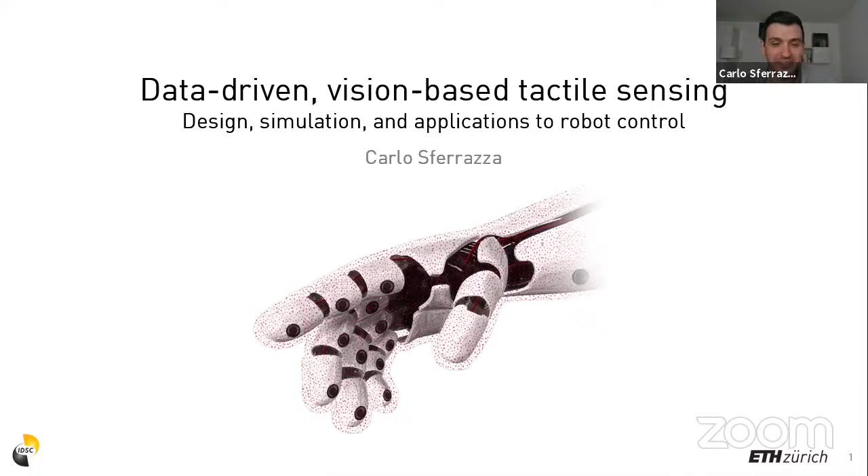So I believe that robots need a dexterous sense of touch to address most of the interaction tasks that they're going to face and that involve physical contact. And this would enable a number of applications, so from warehousing to entertainment, from human-robot interaction to medical devices. And in this context, in the last 5 to 10 years, we have seen an incredible growth in the development of high-resolution tactile sensors for robotics applications.

And these tactile sensors can be based on a variety of different principles. For this reason, I believe that now more than ever, we need to extract intermediate representations from the raw tactile data, such that the techniques and the results could be reused and reproduced even when not the same tactile sensors are being employed. And this will be one of the main messages of my presentation, as I will detail later in the talk.

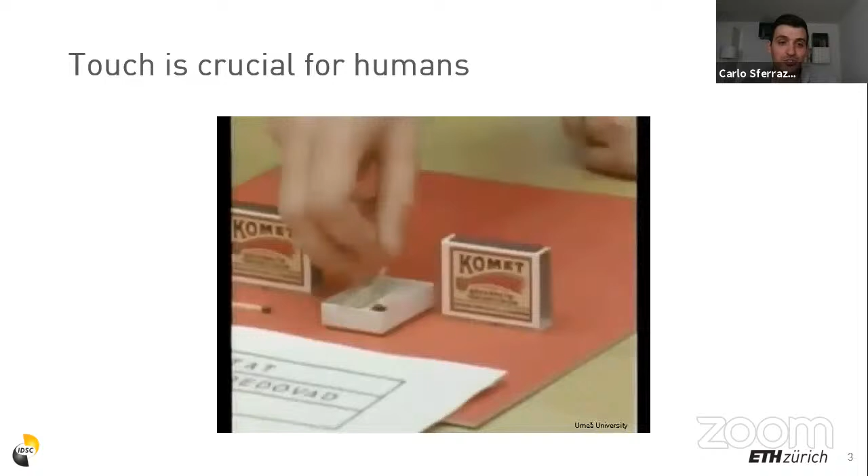But let's take a step back and with a short introduction, see what we generally mean with sense of touch and try to understand the importance of the sensory feedback in humans to possibly extract some requirements for robots. You may have already seen this video where a woman has had her fingers anesthetized, and therefore she can only use her sense of vision, her sight, to perform a very simple task as striking a match. And she's having a very hard time just because she misses the dexterous information usually provided by the sense of touch.

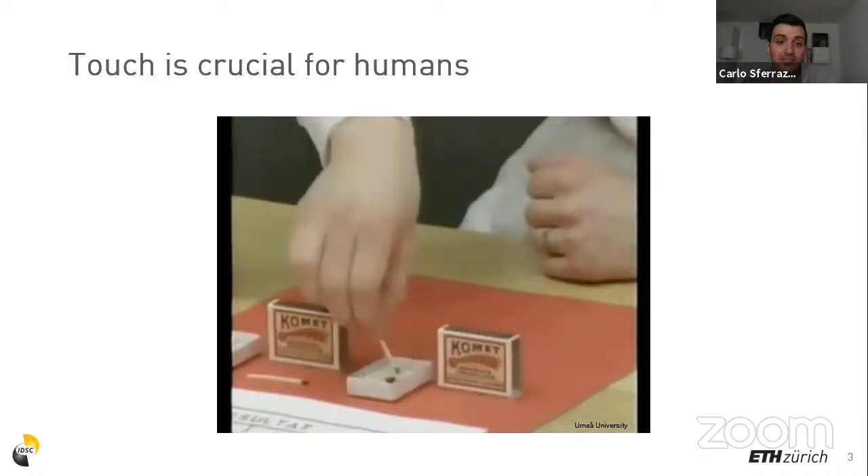If we instead look at robots, the very traditional way of getting touch or contact feedback were force torque sensors. However, these sensors are pretty bulky and they are stiff, so generally they are only used in the robot wrist. Therefore, when interacting with the environment, they only provide information about the forces acting at a single point, usually at the center of the sensor. In contrast, I'm going to show you 3 examples of how the human sense of touch is much more capable than this, which has motivated the increasing development of modern tactile sensors.

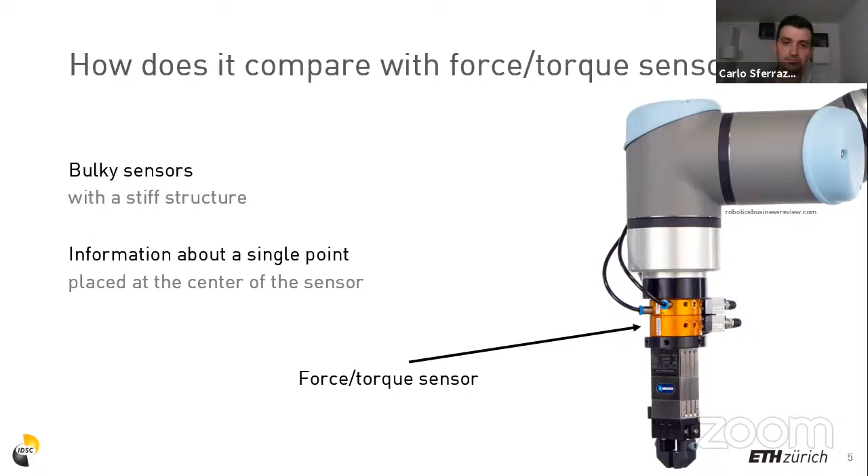First, we have soft and dexterous hands, which provide us with stable gripping when we handle an object, exploiting, for example, the high compliance and the friction of our skin. Additionally, our receptors can very well detect and distinguish between shear and pressure forces, even when they are simultaneously applied over the skin. Finally, our receptors are not limited to specific regions, but distributed all over our body.

And this in particular allows us to perform difficult tasks, as when we do not only use the hands, but also the legs and our chest to lift a heavy box. So we have these sensors, our receptors, that are placed all over the skin, which means over different types of surfaces, which can be either curved or flat. So using these capabilities as an inspiration, I'm going to describe a vision-based tactile sensing principle, which especially tackles the requirements of high resolution and scalability.

The sensing principle is based on the tracking of particles within a deformable surface. So for this, we use a camera, which we place inside this aluminum part, and we surround it with LEDs for constant illumination. On top of the camera, we place 3 layers of silicone. A soft and stiff layer that is transparent and serves as a base for the other 2 layers.

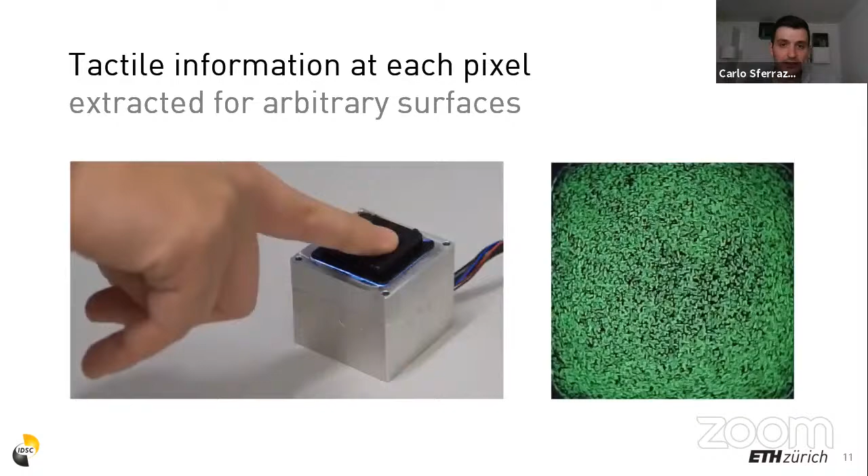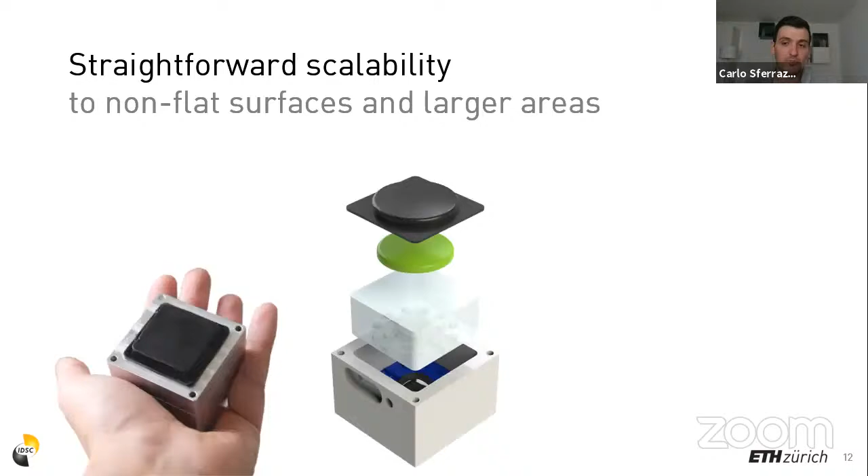The technique I described does not assume the surface to be necessarily flat, as in the case of the sensor that I just showed. In fact, we've also built sensors with slightly curved surfaces, for example, to resemble fingertips, or sensors using multiple embedded cameras, as in the one on the right, where we used 4 Raspberry Pi cameras to achieve at the same time a reduced thickness and a larger surface.

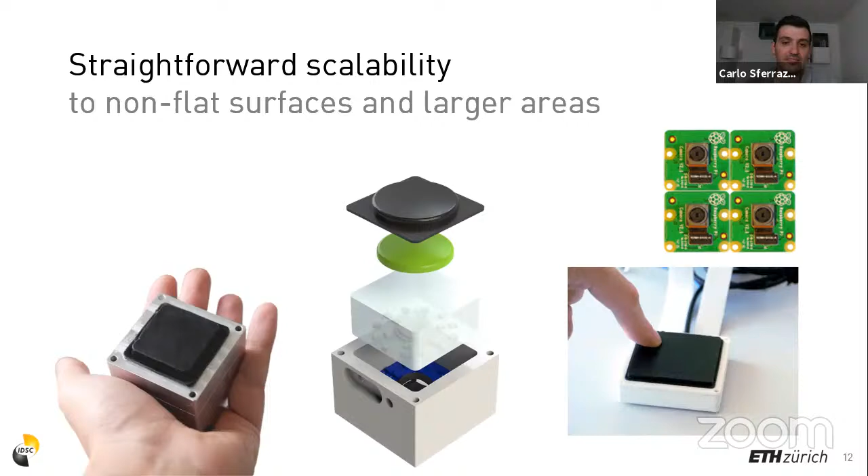All these sensors were fabricated in the same way without any special adaptation and rely on the exact sensing principle, proving the easiness and the scalability of the approach we proposed. So the sensing principle provides raw tactile data in the form of pixel intensities. But how can we further process the pixel information to extract an intermediate representation that can act as a powerful abstraction to plan generic robotic tasks?

So looking at most of the tasks, we are generally interested in total forces, both shear and pressure forces, and contact patches, which are the surface regions in contact with an object that provide, for example, information about the shape of the contact object. And we want to estimate these quantities for arbitrary contact conditions, so possibly for multiple points of contact and for interactions with objects of different shape.

And if we manage to do all of this in real time, we would then have a very powerful sensor which will truly provide the rich information ready to use for generic tasks. With this requirement in mind, we decided to move towards the estimation of a very comprehensive quantity, which is the 3D contact force distribution. And in fact, from the force distribution, one could compute the total contact forces by simply integrating the distribution over the sensing surface.

And one could retrieve the contact patches by detecting the regions where the distribution is greater than 0. And this representation remains valid for the different possible contact conditions, therefore multi-contact, arbitrary shapes, and so on. However, since we want to estimate a finite dimensional quantity, we need an additional step. For this reason, we discretize the sensing surface over a finite number of bins and compute the force distribution as a set of 3-dimensional vectors indicating the force acting at each of these bins.

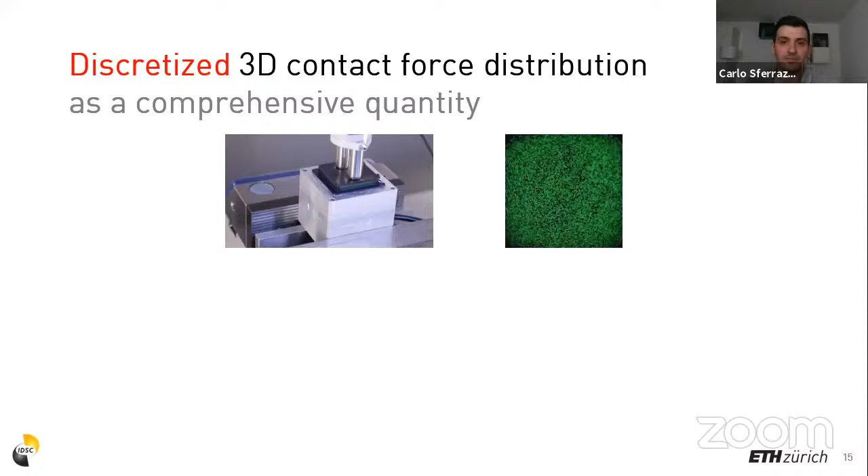So it means that if we make contact with a test object that has multiple points of contact, for example, 2 in this case, we get this image that is to some extent interpretable to a human observer if you can spot sparser regions in the marker distribution here. But we want to further process it and extract a 3-dimensional force field out of it, as you can see here at the bottom. So here we used 400 bins, where the side of each bin was about 1.6 millimeters.

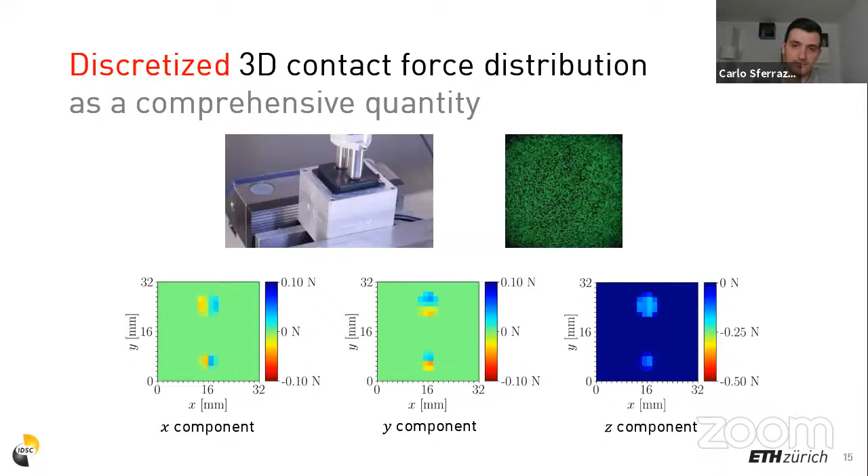And we want to be able to sense contact locations, but also the force profile. Here you can see a higher force in this point, for example, since this finger-shaped body at the top was going deeper into the material than this other one. Therefore, summarizing our task, we have tactile images as inputs and discretized force distributions as outputs. We try to reconstruct these outputs, the force distribution, from the images observed at each time step.

And we do this in a data-driven fashion, since such an approach can theoretically exhibit arbitrary accuracy, depending on the data provided. Essentially, compared to model-based methods, we don't have to compromise accuracy by making model simplifications to retain real-time tractability. We just need to provide very accurate data. And additionally, data-driven approaches generally show very fast inference times, especially if we make use of tailored learning architectures.

Of course, we need to collect training data, and I'm going to show you how we can do this in the next slides. Okay, consider a very simple case where we have a point indentation. So an indentation with a very sharp contact object like a needle. And assume that we do vertical indentations and we only have vertical force, so we can neglect horizontal forces.

Now, if we can measure such vertical force, for example, with a ground truth force torque sensor as the one I showed you before, then we can actually measure the contact force F. And by discretizing our surface into bins, we can assign the force F that we read to this bin here in the center and 0 to all the other bins where there was no contact.

In this scenario, we can even automate the data collection. For example, if we attach such a needle indenter to the spindle of an automatic milling machine, we can then also attach a force torque sensor here at the top, and we can perform thousands of indentations with such a needle-shaped indenter by moving the spindle all over the sensing surface.

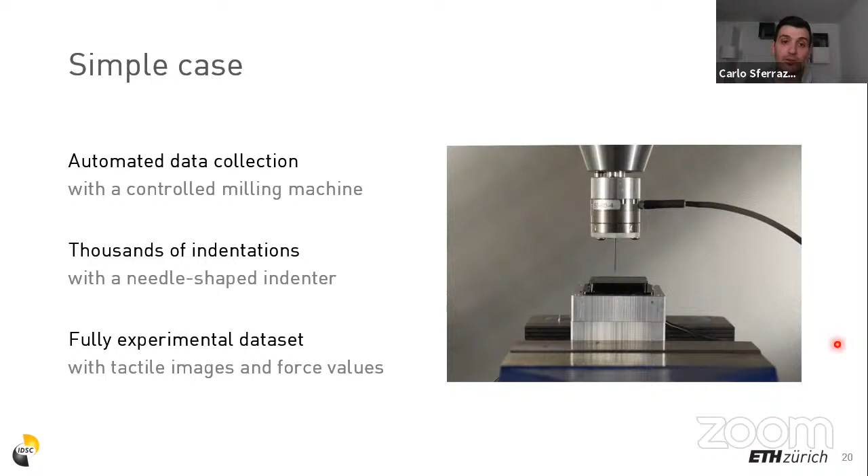In this way, we can collect a fully experimental dataset where we have tactile images captured during the data collection from the internal camera and force values that are recorded by the ground truth sensor.

However, in a general case, we have multi-bin indentations. So we have indenters of arbitrary shapes that do not cover only a single bin, but they cover an arbitrary number of bins. And we want to estimate a 3D force distribution, so comprising both pressure and shear forces. The issue is that we do not have commodity sensors that can accurately measure the force distribution in the real world.

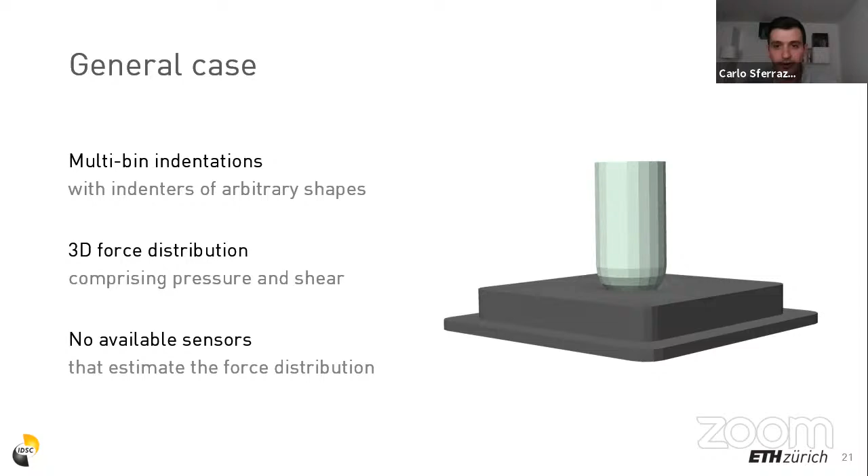So to overcome this issue, we perform in simulation the same indentations that I showed before with the automatic milling machine, but this time we do it in a finite element environment. And for this, we represent our sensor with very accurate hyperelastic models, which we obtain by a state-of-the-art material characterization experiment, of which you can see an example in this video.

And since this is actually the best we can get, we can assign such a ground truth label to the corresponding images that we can capture in real-world experiments, for example, with an automatic machine. Of course, we anyway verify the accuracy of the labels on what we can actually measure in the real world with commodity sensors, the total force.

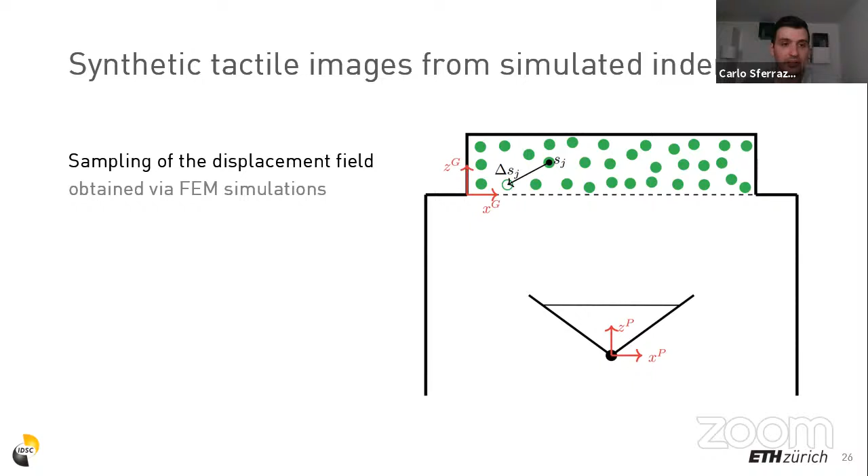So we asked ourselves, is there a way to get rid of this time-consuming data collection and do everything in simulation? Well, we can do this, and for that, we need to simulate the tactile images as well. And we can do this by first sampling the displacement field obtained as well in the FEM simulations.

So what we have to do is to account for the fact that the displacement field we obtain from the FEM is given in a frame which can be not centered with the camera. Therefore, we need a usual transformation described by a rotational matrix and the translational vector from the frame of the FEM to the reference frame of the camera here.

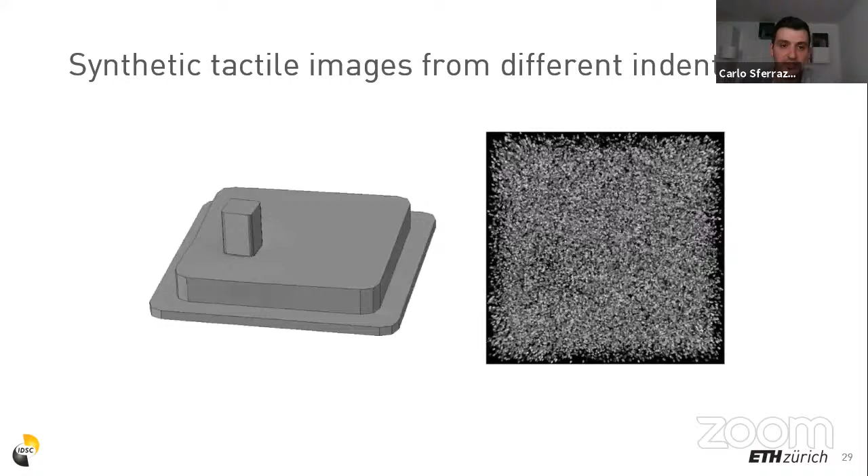And so in the end, we can collect a data set, which is made entirely of synthetic tactile images that we can express as a two-channel tensor. Two channels because the first channel contains an image which is taken before deformation, and the second channel contains the image after deformation. You can see here the sparser regions that arise after deformation.

And at each of the samples in the data set, we randomize the distribution of the markers, and in some cases also the density of the markers, as you can see in here, it's a bit of a sparser distribution. So summarizing, we finally have both features and labels from simulation, where features are raw tactile images with a randomized distribution of the markers, and all these images are obtained from finite element simulations. The same finite element simulations provide us the labels, our ground truth force distributions.

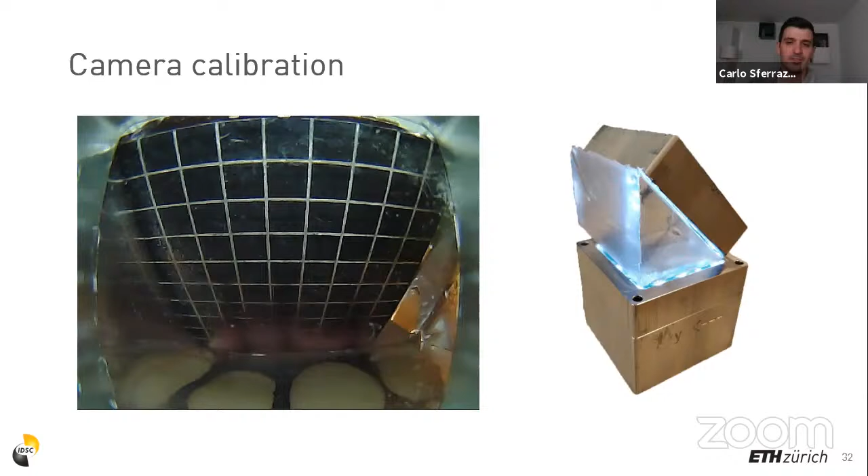But since these data are valid in the simulation domain, how can we make sure that whatever mapping we learn from this data also works in reality? For this, we need an additional step, which is camera calibration. Essentially, we need to take some pictures of a predefined pattern to extract the camera model. And since we use our camera through a silicone medium, we need to do the calibration also through silicone.

So essentially, what we do is to collect 6 images of this predefined grid pattern through some silicone shapes. And by using a state-of-the-art calibration technique, we can obtain both the intrinsic and extrinsic parameters of the camera with a sub-pixel accuracy. Finally, we use the model we obtained from calibration to remap the images taken in the real world as if they were shot from the ideal camera that we used in simulation.

And this is a crucial part because we can redirect any instance of sensors that we fabricate to the same pinhole camera model. And this adds a lot of benefits to collecting data in the pinhole camera frame. So this is how remapping works. For each pixel in the ideal pinhole camera, we can project it through the 3D world by making the assumption that the particles have a fixed vertical coordinate. And then we can project back through the calibration parameters to the real world image to find the corresponding pixel.

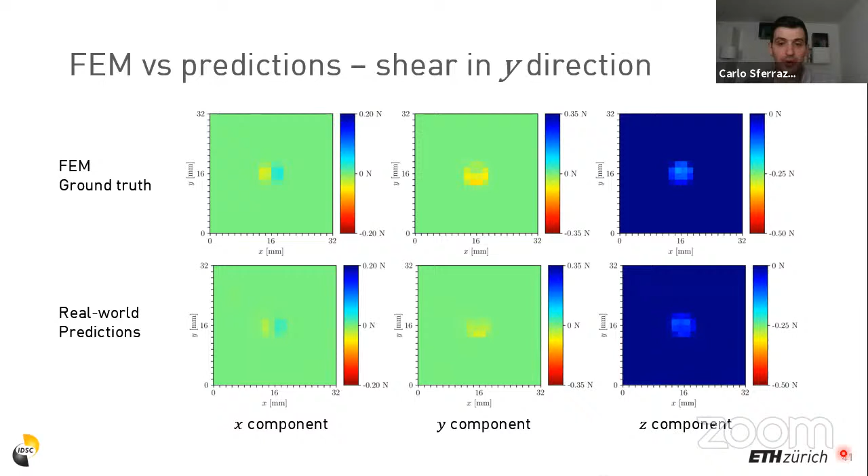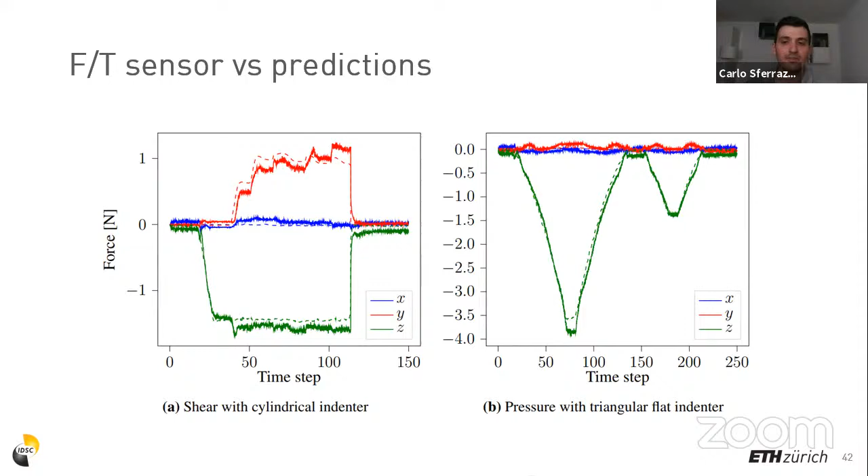Finally, even if we only train the neural network on data consisting of a set of specific contacts, the convolutional structure of the network shows generalization capabilities when applied also to generic objects, as well as in the contact with multiple bodies, a case which was not present at training time.

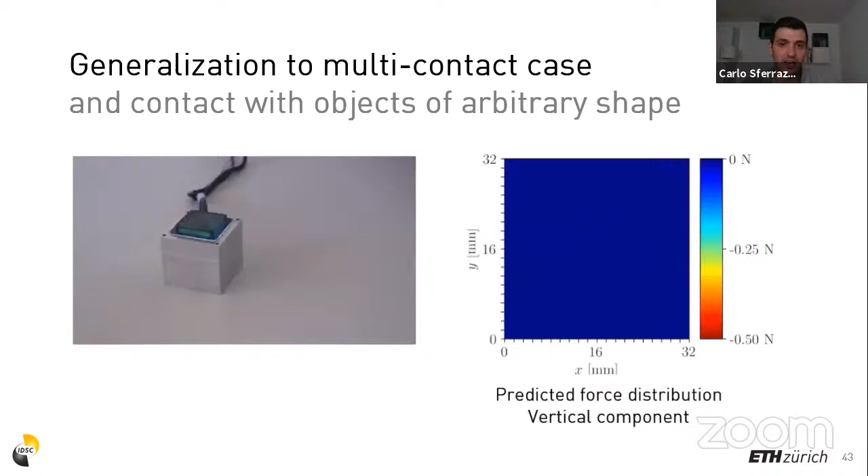So drawing an outlook on this work, let me point out that the current simulator is static, so it neglects all the dynamic effects that can be of interest for certain applications. And in addition, we only consider a fixed friction coefficient, as I showed you earlier, tuned with one indentation. It worked well across several materials that we tested, but if a more accurate estimation of the friction coefficient would be necessary, then you would need to identify this coefficient, for example, over time from different frames of the tactile images.

Finally, here we focused on building a very accurate simulator such that we could achieve a seamless transfer from simulation to reality. However, one could think, for example, of using domain adaptation techniques that explicitly aim to reduce the gap between simulation and reality.

So the next thing we asked ourselves is, how can we use this powerful physical representation as the force distribution that we can now estimate with our sensor to achieve dynamic tactile control tasks? So we wanted to design a testbed that was at the same time low-dimensional, but representative of the problems encountered when dealing with contact in a generic manipulation scenario.

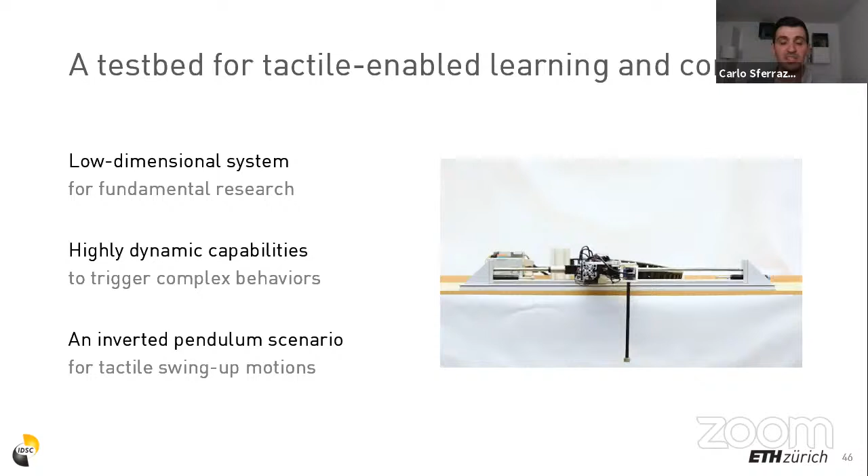We also wanted our system to be capable of highly dynamic motions, for example, to trigger complex behaviors that are often neglected when one performs slower manipulation tasks. Therefore, we built a system that resembles a classical inverted pendulum, but without a mechanically fixed pivot point. This means that we want to grab a pole and swing it up to a vertical position without having the pole physically attached to the gripper.

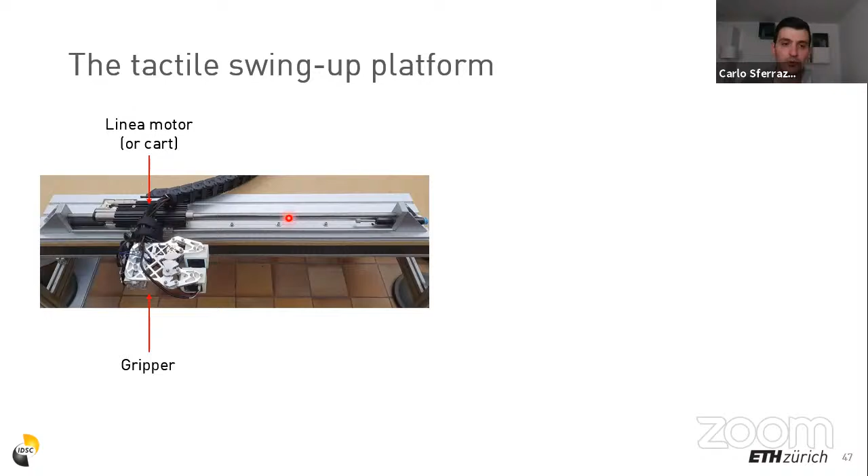More in detail, the system is based on a linear motor that we call a cart that displaces the gripper over a stator. And if we look at an exploded view of the gripper, this is actuated by a servo motor, a Dynamixel, and mounts two fingers equipped with two of our tactile sensors. And the sensor used here is the one I showed you earlier in the talk, with a slightly curved surface to recall a fingertip.

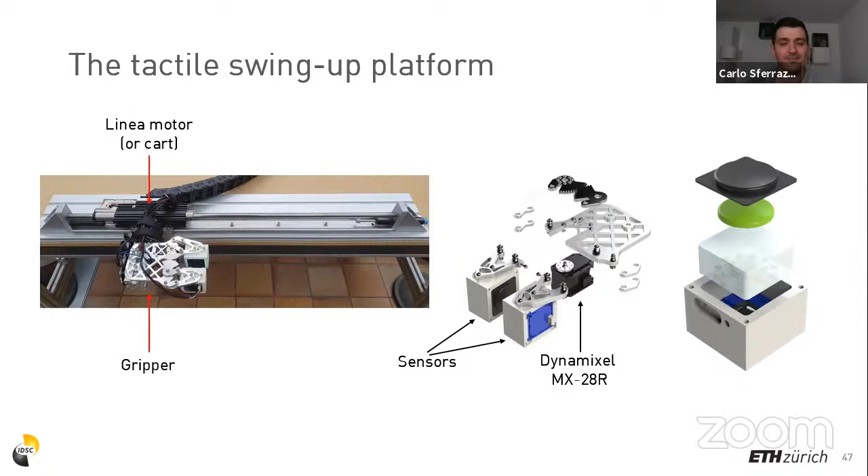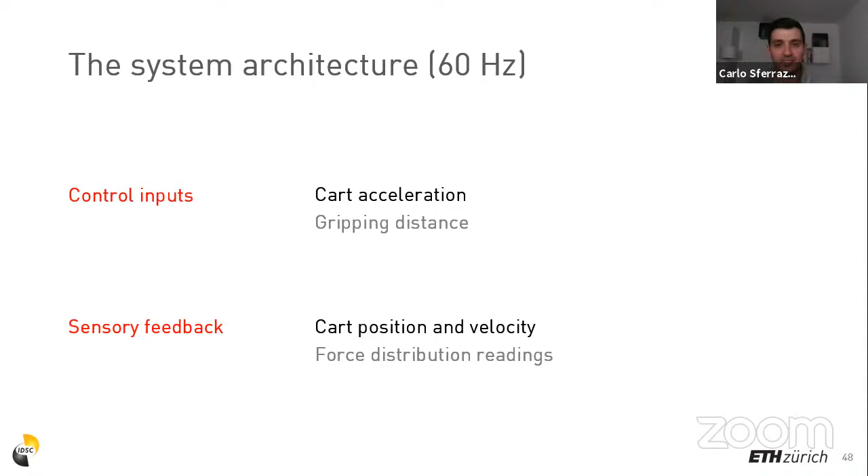Therefore, summarizing the system architecture, we have two control inputs, which are the cart acceleration and the gripping distance. And we have sensory feedback about the system, namely the cart position and velocity, and the force distribution that we measure with our tactile sensors. Everything runs on embedded platforms.

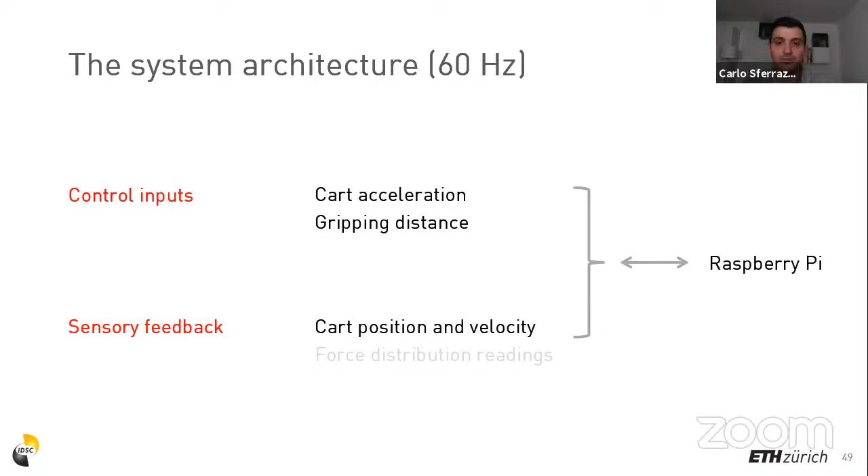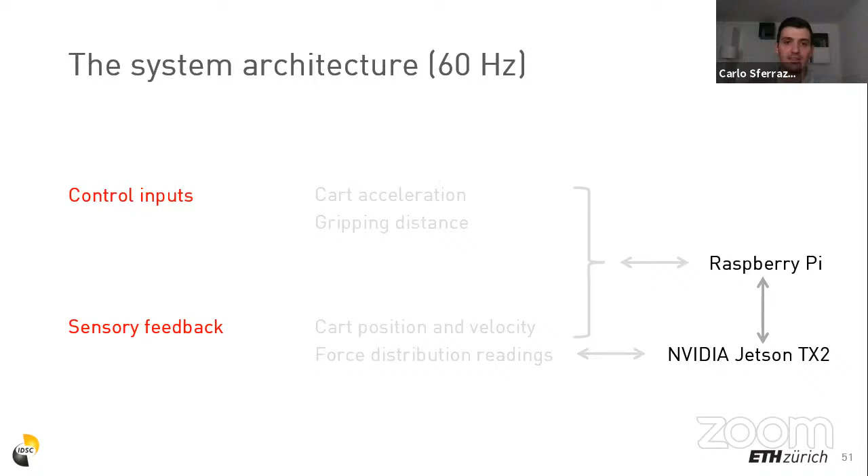A Raspberry Pi sends the commands to the actuators and reads the cart position and velocity from the linear motor. And an NVIDIA Jetson TX2 is employed to predict the force distribution with our tactile sensors, as well as to run most of the control algorithms that I will describe in the following. So for this reason, the two devices communicate via Ethernet, exchanging all the relevant information. The sensors employed here predict the force distribution in a very similar way, as I explained earlier, with a data-driven model entirely trained with simulation data.

So let me instead focus more on the control problem. And here, the main difficulty is given by the fact that contact dynamics and soft materials are very hard to model analytically. Therefore, learning from data seemed to be an appealing alternative to overcome this issue. However, learning on such a system is really time-consuming because you either need an automatic collection system or you need a very dedicated operator that takes the pole and brings it back to the original position every time that it flies away during data collection. So for this reason, we shifted our focus towards obtaining policies in simulation using deep reinforcement learning algorithms.

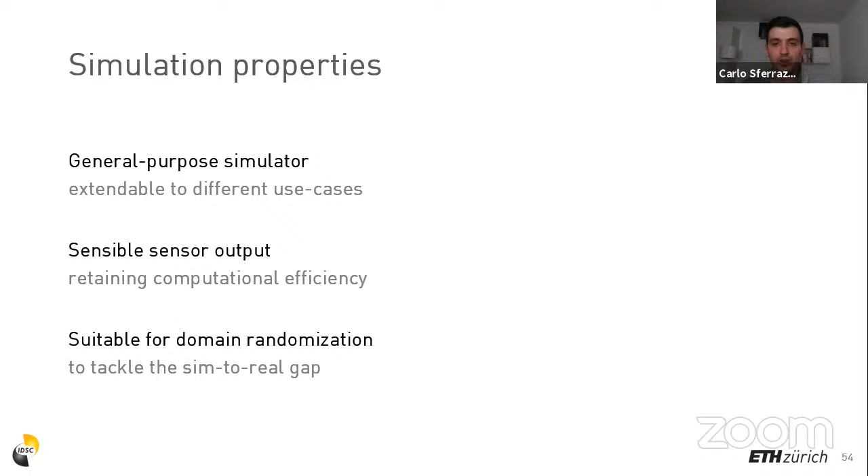So let's look at what we need from a simulator of the system. Well, first, we would like it to be general purpose such that it can be extended also to different use cases. Then we want it to generate sensible sensor output, the force distribution in our case, while retaining computational efficiency. Finally, a common technique to tackle the sim-to-real transfer consists in randomizing the simulation parameters to increase robustness in the control policies. Therefore, we want our simulation to be modular enough such that we can perturb these parameters during training. All these requirements can be satisfied with a strategy that is based on the finite element method, with the simplification that the materials are assumed to be linearly elastic.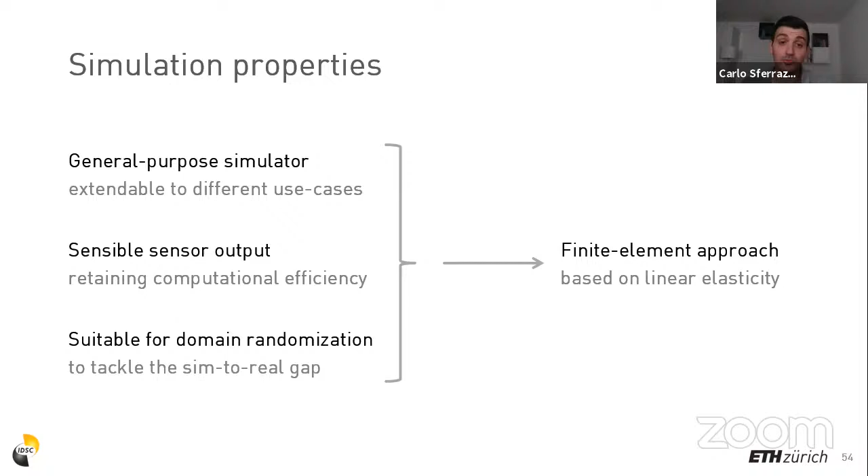So how does this simulation work? Well, first we simulate everything at the level of the forces. And this is made possible by the fact that our sensor already outputs force values. Therefore, we do not need to simulate the optics, which facilitates the system modeling. The material model is also simplified, as I mentioned, by relaxing the hyperelastic assumption and assuming the materials as static linear elastic. This is a very strong assumption, but turned out to be enough to capture the trends of the force distribution in the simulations.

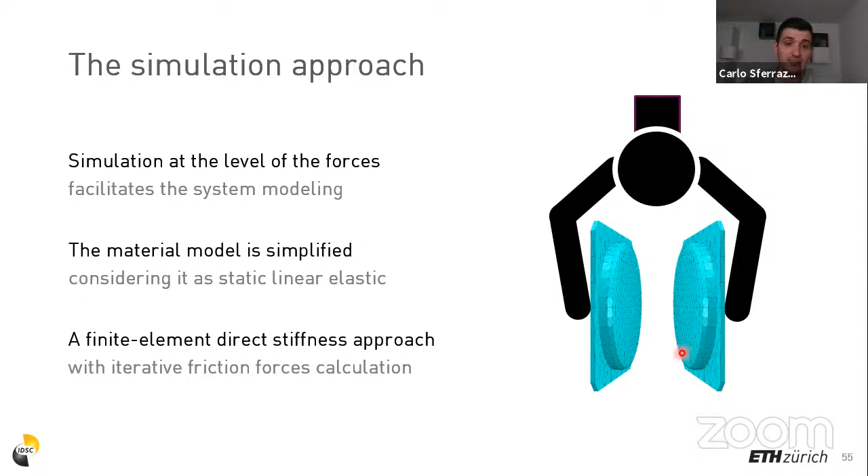Based on this, we developed a finite element direct stiffness approach, which we augmented with an iterative calculation of the friction forces. For this, we first mesh our sensing surface, dividing it in a series of finite elements. The method then works in two steps. First, we identify the forces arising from frictionless normal indentations. For this, we divide the nodes of the mesh in three sets. The figure here shows the nodes as dots spread over the sensing surface in green.

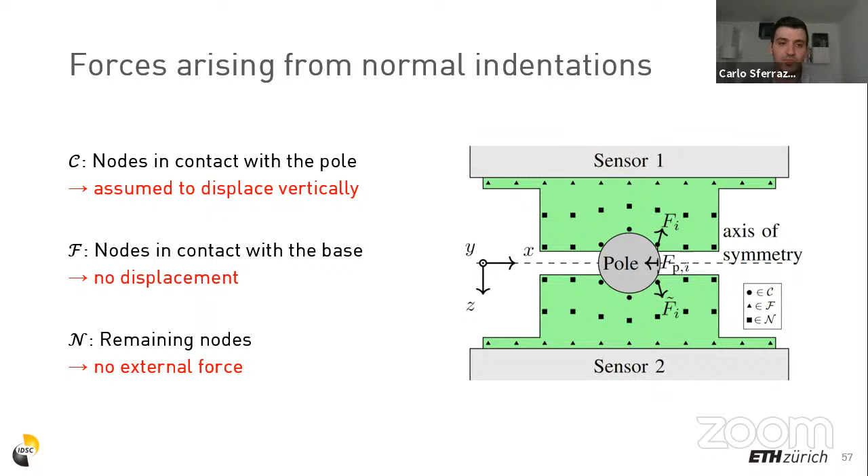Then we define the set C as the nodes in contact with the pole. So these nodes here, for example. Then we have the set F that contains the nodes in contact with the base. And then we place all the remaining nodes in the set N. Well, it turns out that we know something about each of these sets. For example, we know that the nodes in the set C stay attached to the pole. And if we assume them to stay in contact with the pole and displace vertically, we know everything about their displacement. Also, the nodes in the set F are attached to the rigid base of the sensor, therefore they do not move. And the remaining nodes have no external forces applied on them.

In this way, we can finally apply direct stiffness, which is based on a stiffness matrix, K, that can be built offline in a finite element environment and is constant only for linearly elastic materials, therefore our assumption. This matrix relates the nodal forces with the nodal displacements. And for each node, we either know the displacement or the forces. Therefore, the system of equations can be solved very efficiently to calculate the remaining unknowns.

The forces F0 obtained here consider a frictionless contact, so the next step is to account for the presence of friction. We do this in an iterative way, that is by first assuming that friction force is only unknown at the one node that we call I. Then we compute the friction force at a node I, assuming the Coulomb friction model. I will show you more in a second. Then we repeat this procedure for all the nodes and iterate until we converge to a certain value or for a fixed number of iterations.

Finally, we sum the resulting friction forces FF with the forces resulting from normal indentations, as we computed in the previous step, to obtain the forces F that are used in our simulation to simulate the system by propagating them through the forward dynamics, where we use a semi-implicit integration scheme, such as in gaming engines or in simulators like MuJoCo. But we also use the distribution of the forces F to generate the synthetic sensing output as well, our force distribution, which can be obtained again by discretizing the sensing surface.

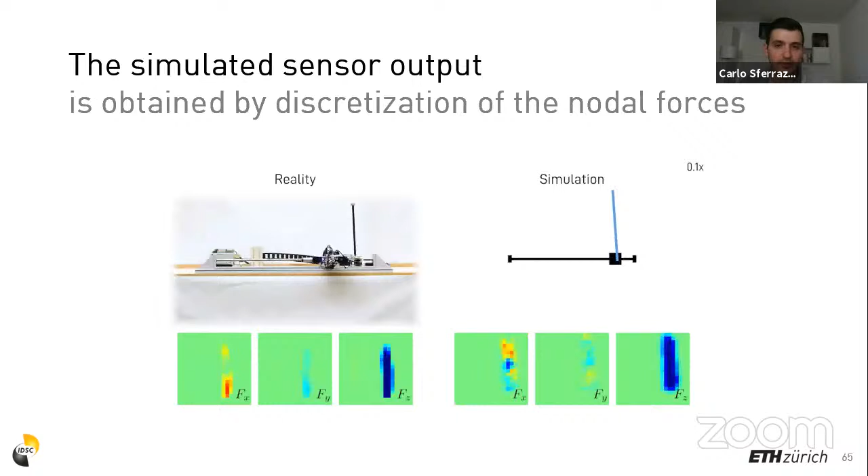So you can see the result here with a comparison between the forces predicted in the real world versus the simulated sensor output. And the simulation is very efficient and runs at 360 Hz on a single core of a standard CPU, which means 6 times faster than real time.

We can then use such an efficient simulator to tackle the control problem in simulation using deep reinforcement learning. As a requirement, we would like to swing up poles of which the physical parameters are unknown to the policies. However, this breaks the Markov property assumption because we introduce additional unknowns in the system's dynamics.

Additionally, state information is incomplete on the real system or only indirectly available. In fact, we don't directly measure, for example, the pose of the pole, but we can only indirectly observe it via the force distribution measurements.

For this reason, we take a privileged learning approach where we first exploit the full knowledge of our system in simulation. We therefore define an augmented state x'(k) here as the concatenation of the system state with the pole's physical parameters.

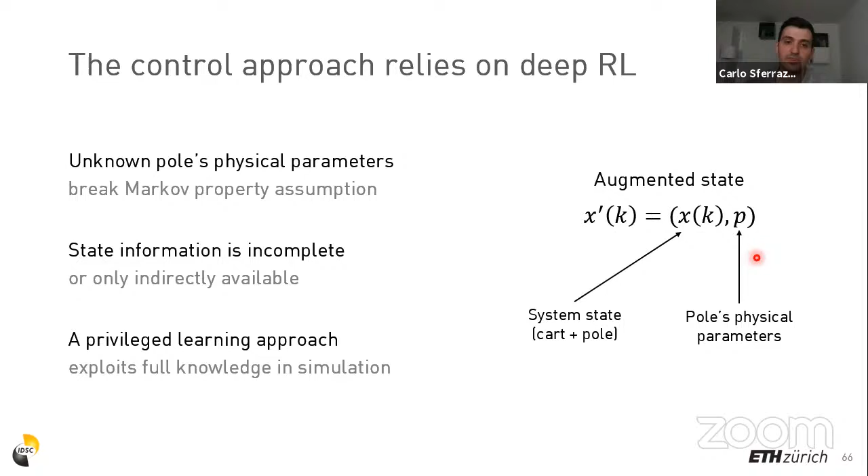Then an expert policy is trained using an off-the-shelf reinforcement learning algorithm, where the physical parameters of the pole are randomized at each new episode during training. In this way, the neural network that parameterizes the policy chooses different actions based on the features of the pole.

The policy is optimized by maximizing an expected reward, which depends on the privileged information about the augmented state, and aims to swing up the pole by performing this 180 degrees rotation while maintaining low slippage. You can see here the results of the training with the expert policy that is able to consistently swing up poles that differ in mass, diameter, and length.

Finally, we develop a student policy, which is trained as well in simulation to learn to imitate the expert, and to exploit the fact that the parameters of the pole are observable via the force distribution measurements. However, since the Markov property is not holding, we need the policy to reason over time.

We therefore define an observation O(k) as the concatenation of these four quantities: the cart position and the gripping distance that we can read from our actuators, the pole orientation that we can estimate from our force distribution readings, and the total normal force, which can also be computed from the force distribution.

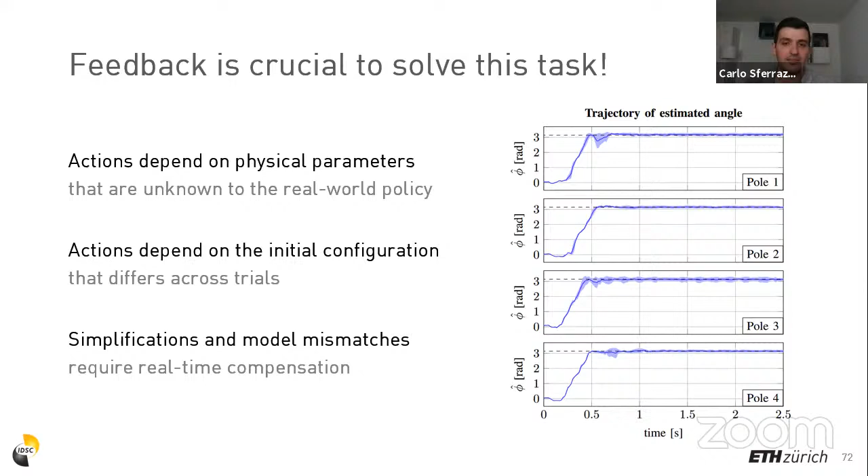And even if these two sources of uncertainty were to be eliminated, it would still be very challenging to achieve such accurate set point tracking as is shown in this plot for repeated trials.

Looking also at failure cases, this table shows experiments with 4 different poles where we aim to perform 10 successful swing ups with each of the poles. You can see that for the successful test, we had comparable final errors in the order of 5 degrees. Pole 2, the longest, was even slightly outside of the training distribution range.

However, we noticed a higher failure rate with pole 1, and I've tried to give you some intuition about the typical failure case. Essentially, our simulation underestimates an effect that we observed in the real world. So what happens is that when clamping, our material shows a relatively strong spring effect that makes the pole bounce back from the vertical position.

So the cart tries to correct it by providing the right acceleration that you can see here between 0.5 and 1 second. However, for short poles like pole 1, we need aggressive accelerations to achieve the same desired torque. In some cases, this makes the motion become too jerky, and then we lose grip of the pole.

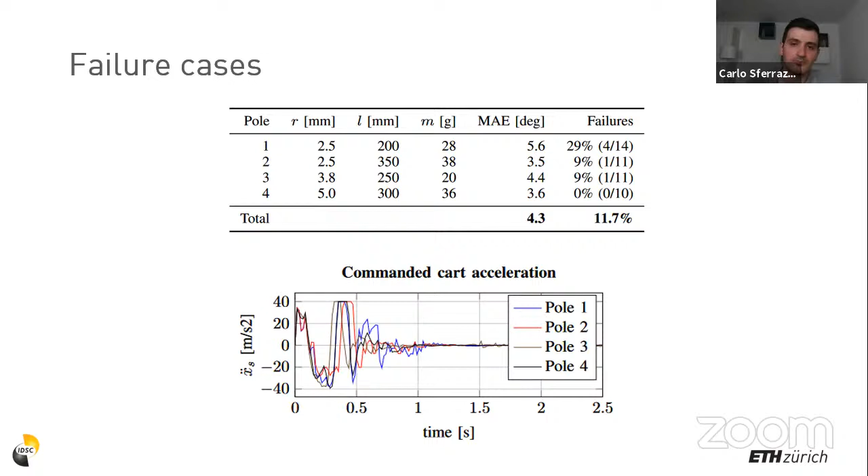So this approach is relatively successful with the swing up, but can it work for different tasks? It turns out that by tweaking the reward in simulation, it is possible to achieve different motions, such as a throw and catch maneuver. Of course, replicating this motion on the real system requires addressing other issues, such as the non-planar motion of the pole during the flight phase, but the estimator could easily be extended to account for these effects as well.

So let me draw an outlook to mention where I think we are and where we are heading with this work in the direction of dexterous manipulation. Well, first, this system achieves a rotational motion of the pole without directly controlling a rotational degree of freedom. Therefore, this is only made possible through the presence of friction. And for this task, as for many others, modeling friction is crucial to design realistic simulators, and this will remain a very relevant aspect in addressing manipulation tasks.

The simulation approach I presented only used the fact that the pole is cylindrical when dividing the nodes in different sets, as I showed you earlier. But the approach can be extended to various geometries via the use of efficient algorithms that solve the intersection between polygons. Finally, we knew that for this task, angular and total force were key to perform the swing up.

And therefore, we used those as part of the history of observations. However, for different tasks, it could be beneficial to design algorithms, for example, based on autoencoders, that could automatically discover the meaningful intermediate representations from the force distribution readings to further improve the generalizability of the approach.